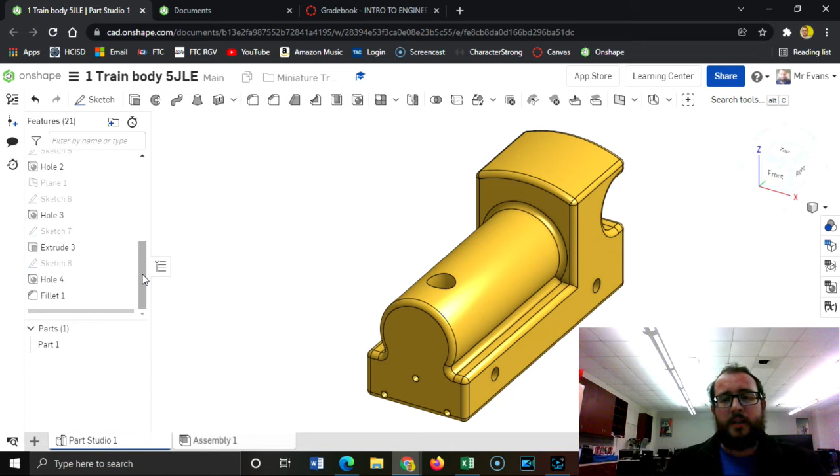Today we're going to make the train body. As you can see, it takes several steps. None of them are overly hard, and maybe only a few items you haven't done before. But it is very dimension heavy. With all the little holes, each hole comes with 3 dimensions: its size and 2 dimensions for its location. So if you mess up one, it's going to be off. I'm going to go through this whole process from start to finish to make the train body, and later we'll learn how to decorate it better. Remember, this part is made out of yellow brass, which should contrast nicely with all the red brass pieces we've been making. Let's get started.

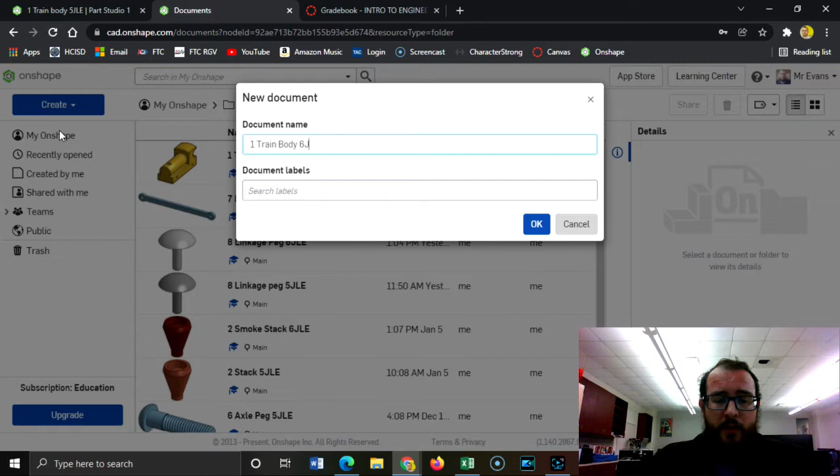In your miniature train folder, which you should already have, create a new part: one train body, then your class period and your initials. All right, let's go.

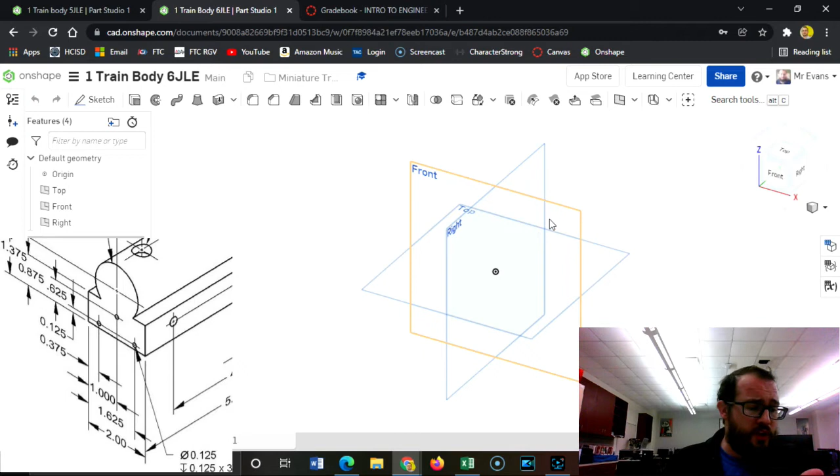To get this started, let's get the overall shape, starting with the front of the train. It's going to be a rectangle with a circle a certain height above it, and we'll combine those two together as one sketch, then extrude it the distance forward. The whole thing is 5.5, and the cab in the back is 1.75, so we'll subtract those two and make our first shape.

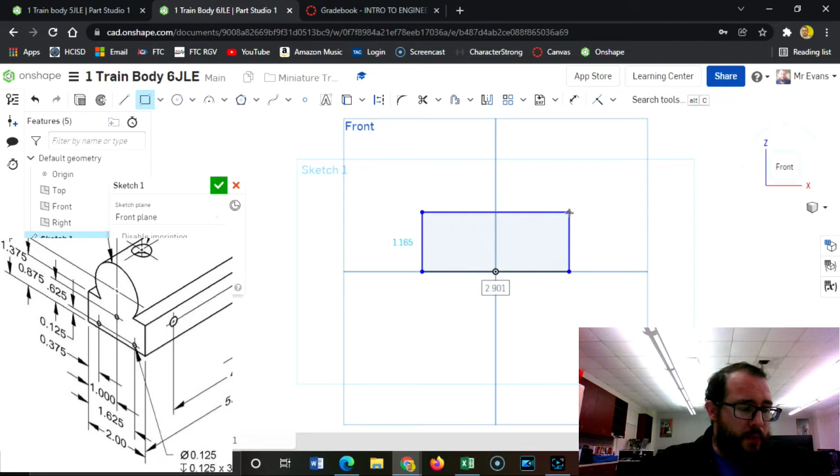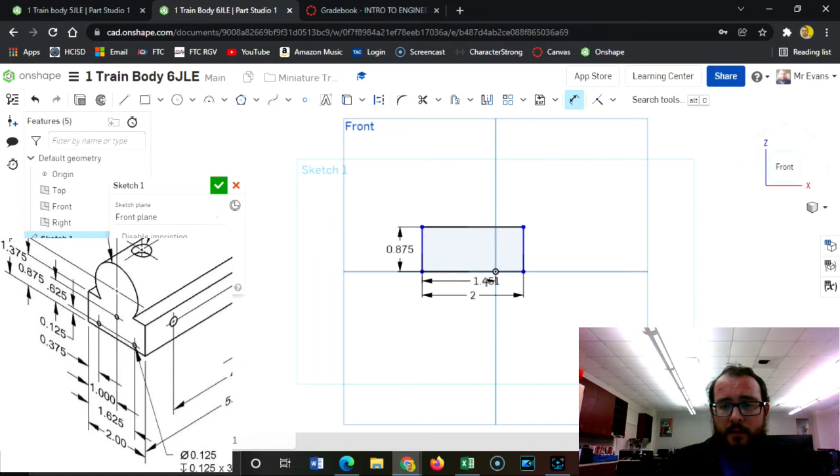I think it's important that we keep this thing centered. I want the right plane going right through the middle of the part. The entire train is 2 by whatever, and just the bottom rectangle part is 2 by 0.875. But I want this thing centered. So I'll take a dimension tool, click on the side, any one of the sides will do, then click on the right plane, that line right through the middle, and set that to 1 so it's centered. I think this is very important.

Next, I'm going to make a circle. Notice how it's lining up to the origin. I'll click somewhere up here and stretch it out, without snapping it to anything. I want that to be a radius of 0.75. This is a diameter, so that should be double that — 0.75 times 2, which gives us 1.5.

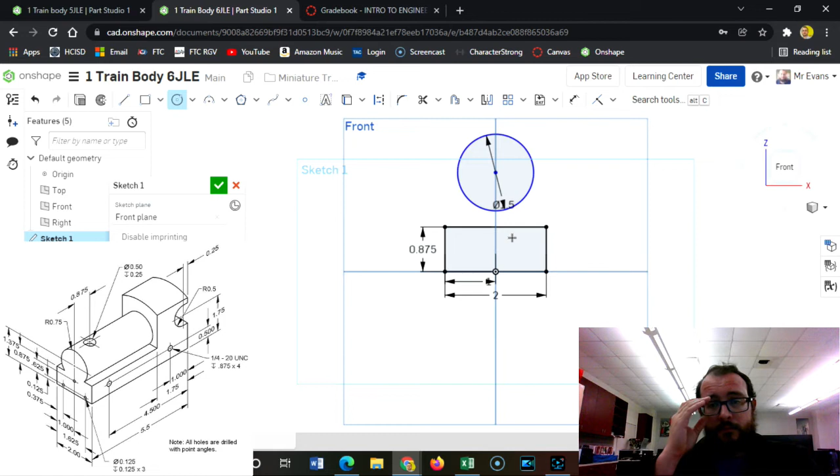Now it doesn't seem to be lining up correctly, and that's because this is a certain height above the bottom of the train. If you look, it says it's 1.375 from the bottom — the center of the tank part there.

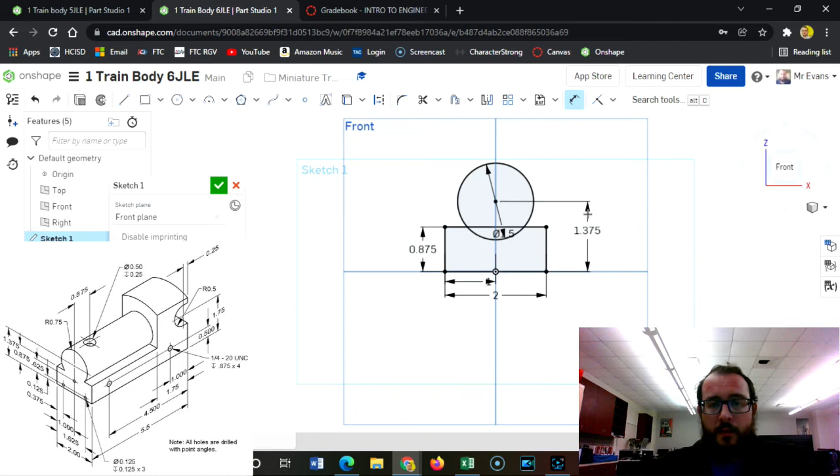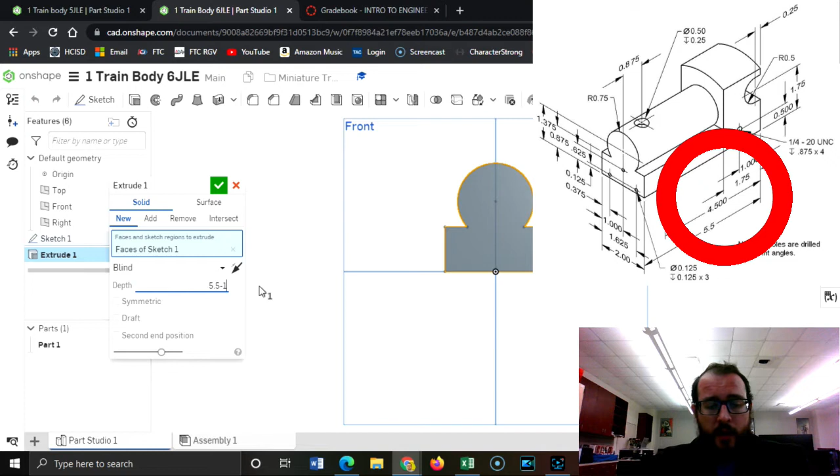There we go. Now we're going to cut the intersection part so we can make this all one piece, and it's ready to be extruded. The whole train is 5.5 and the cab is 1.75, so I'll subtract that part from it, then get the full extrusion that I need.

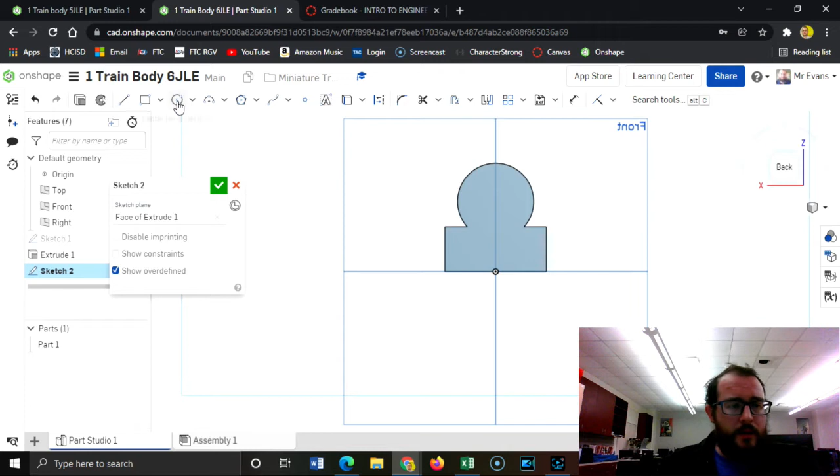There we go. Now to do the cab part. Let me create a sketch on the back here, right on this surface. If you look at the bottom picture, it shows the back of the cab, and there's a little hole at the back — it's the hitch magnet hole for the hitch peg, so you can connect cars to it. It says that hole is 0.375 above.

Let me just put a point for that: 0.375 here, 0.375. And from that, there's an arc. I'm going to use a center point arc, centered right here.

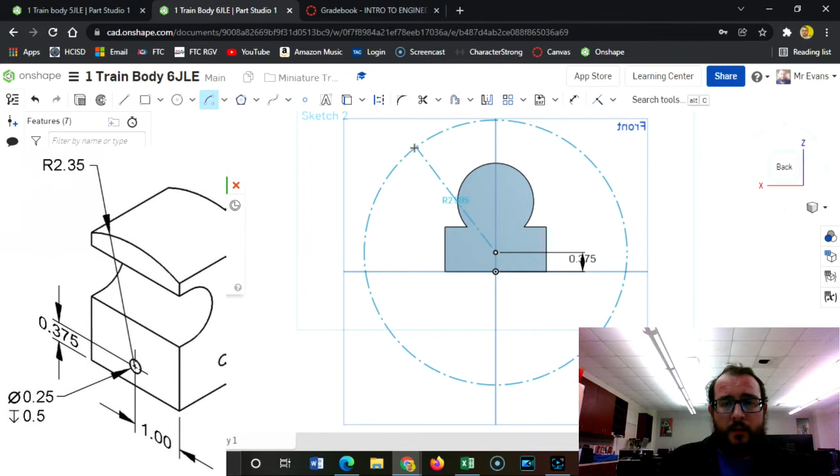And that has a radius of 2.35. There we go. It's important that it has the correct center. If you don't have the correct center, it's going to be off.

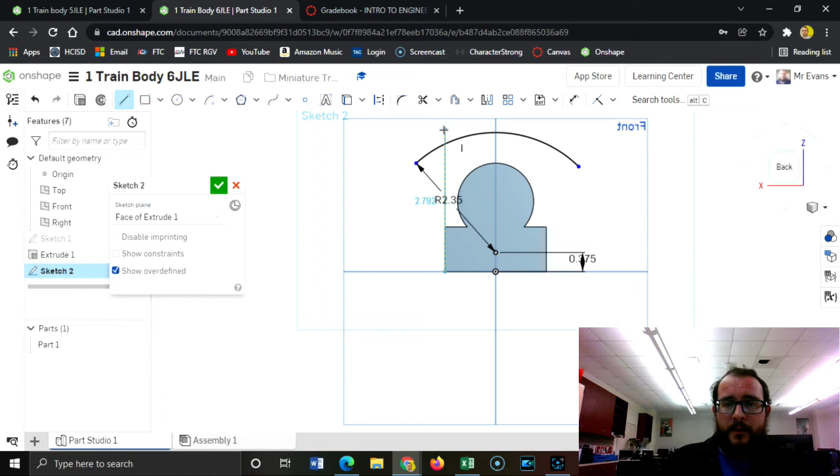Now it kind of looks tilted, but now I need to put some lines going straight up, and then trim everything up. So I need a line going straight up here, and then a line across the bottom, and then going straight up, and we'll trim off the excess.

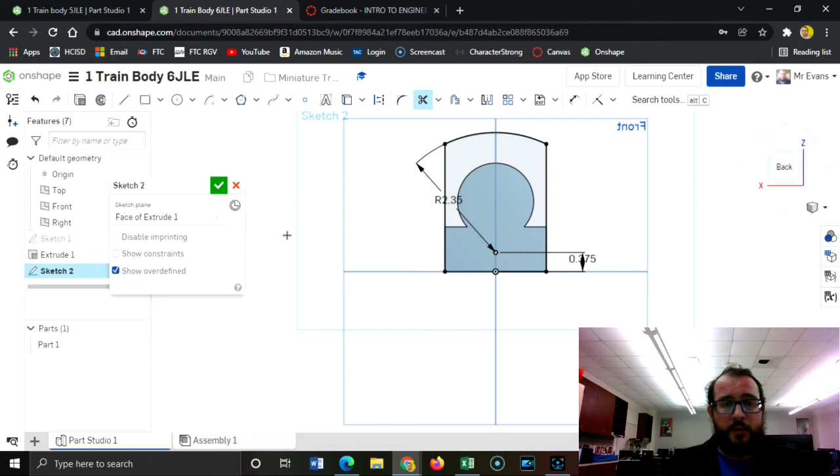There we go. I believe that's all we need to extrude that 1.75 out. So we'll hit extrude, click both of them, and that's 1.75. There we go. Now we have the overall shape.

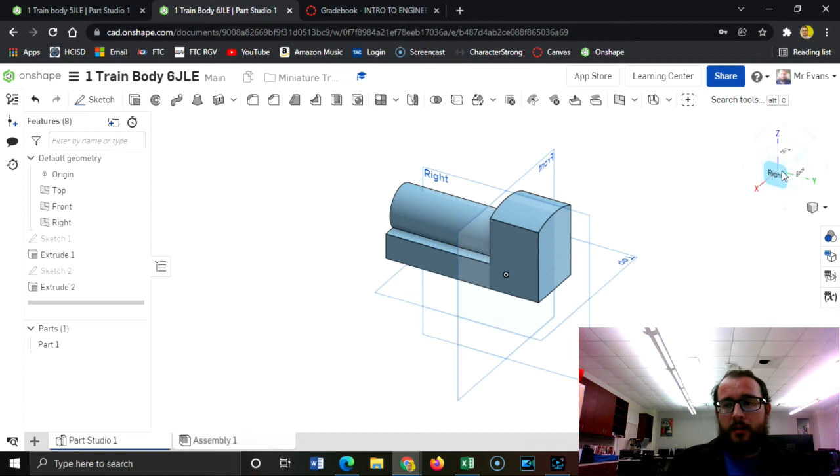The only other bigger feature we're missing is cutting the cab out of it. So we're going to create a sketch on this surface. The main part of that is a circle, it's a semicircle, and then the back of it is a rectangle shape. So to make this, I need to start with a circle.

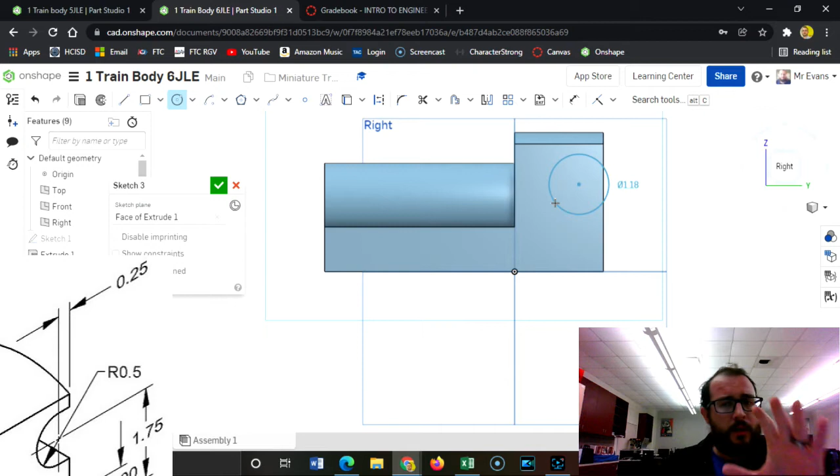I'm just going to click somewhere in the cab, not on a line or anything, just somewhere in the cab. That needs to be a radius of 0.5, which would be a diameter of 1. This is taking some time loading, apparently.

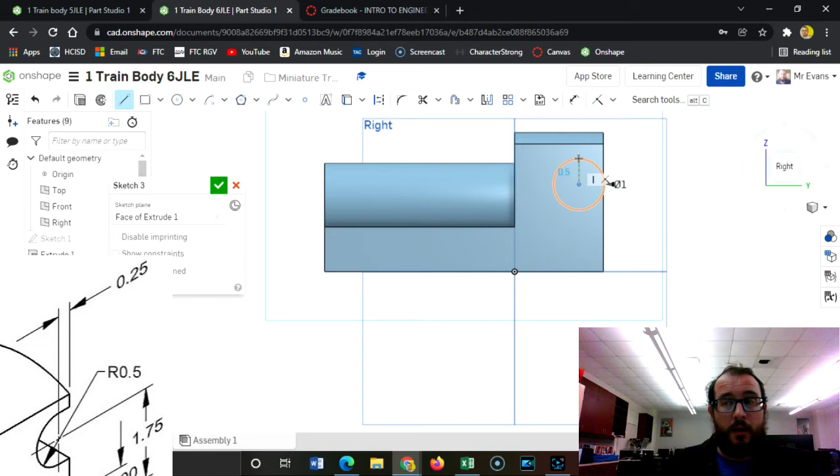Then I'm going to use the line tool. I'm going to click on the center and go straight up, click on the circle. It needs to be a vertical line. You see the symbol there that's a straight up and down line? That means horizontal—sorry, vertical. That means vertical. Then I'm going to come out horizontally and click here. Hit escape, and then do the same thing but down below.

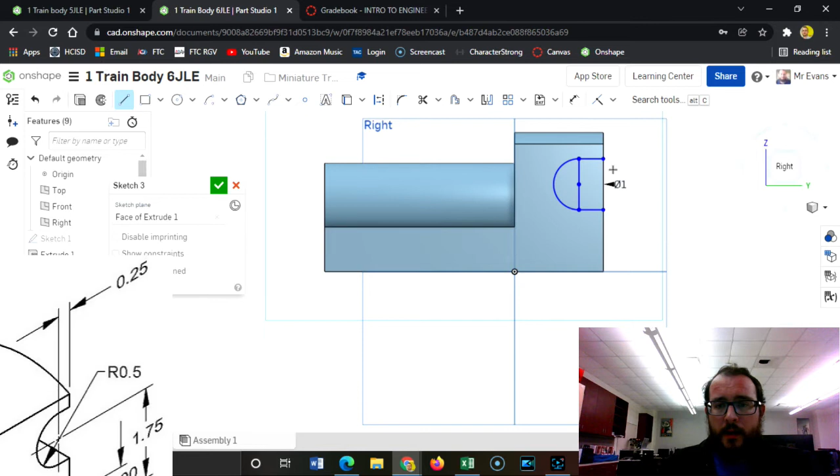Going to use the trim tool now to trim off that part, and then close this off. And I can remove this part too if I want. There we go.

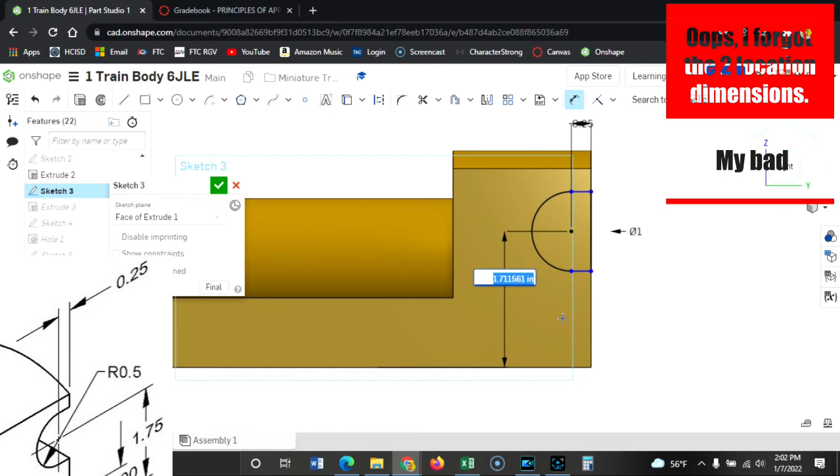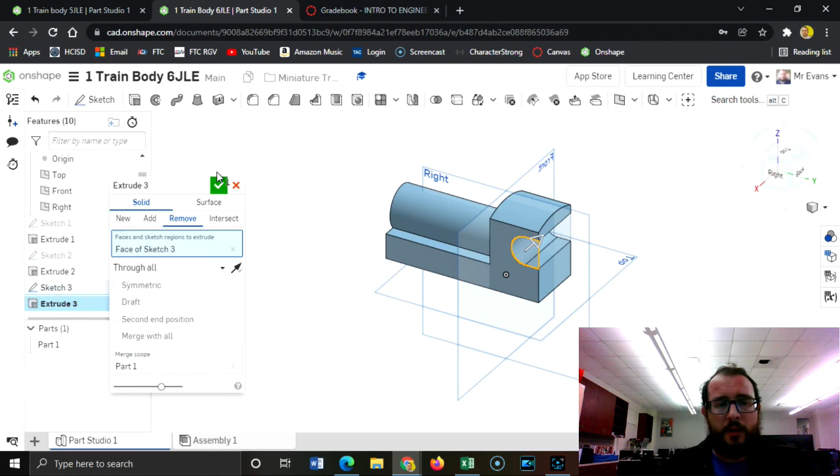So now I just need to extrude that. Remove through all. Looks like it works. Check mark. All right, so now we have the basic shape.

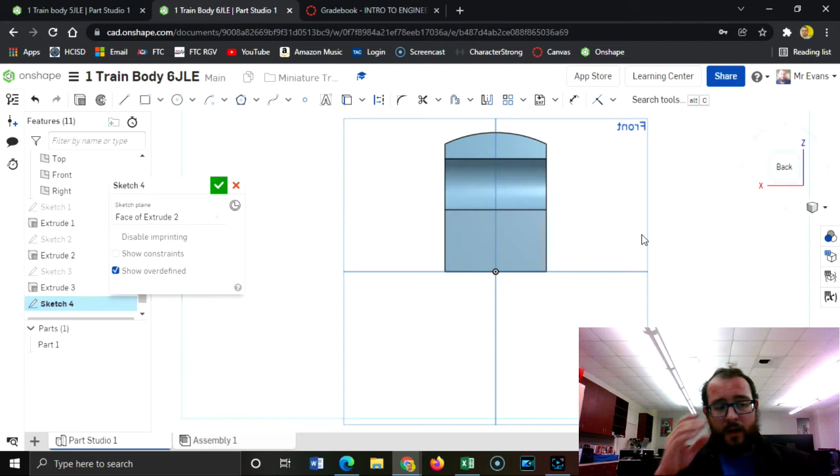The next step is to put in all the holes, and that part takes some time. So let's get each one down. Let's start by putting a sketch here. And we have a hole that is 0.25 and 0.5 in.

So I'm just going to put a point where the center point will be. See how it gives me that right there? I'm going to just put a point there. Check. And then I'm going to click on the hole button. Click our point. We want not a counterbore, just a simple hole. Blind, meaning it has a certain depth to it, not all the way through.

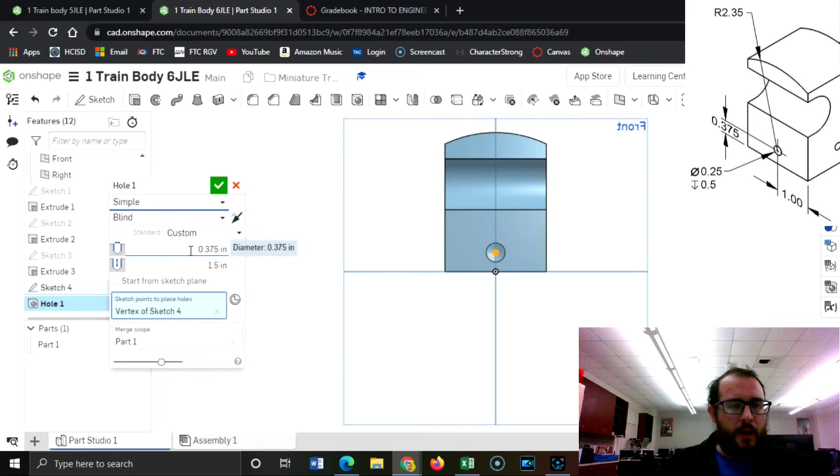Its diameter is 0.25, and 1/2 inch for depth. Okay, now we should have some holes on the side.

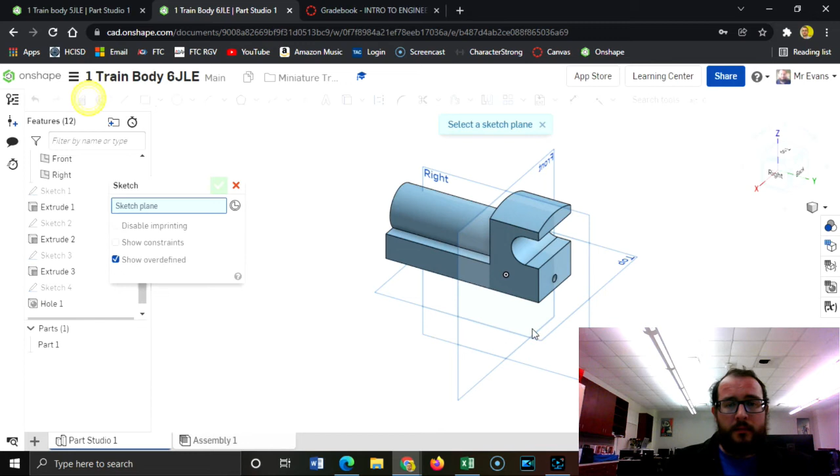We're going to have 2 points. And I want these points to be horizontal to each other. So I'm going to click each one and say horizontal so that way they're lined up. That's very important—if you don't, then you've got to do two separate dimensions for height.

According to this, it is 1/2 inch high, and it is 1 inch over, and this other one is 4.5 inches over. Again, you can get all these numbers from your paper in your notebook.

Now, this thing calls out that it's 1/4 dash 20 UNC. It has a depth of 0.875, and it says times 4. That's because there's holes on both sides. 1/4 means 1/4 of an inch. 20 UNC means it's threaded. It has a thread count to it, and that's what we're going to do.

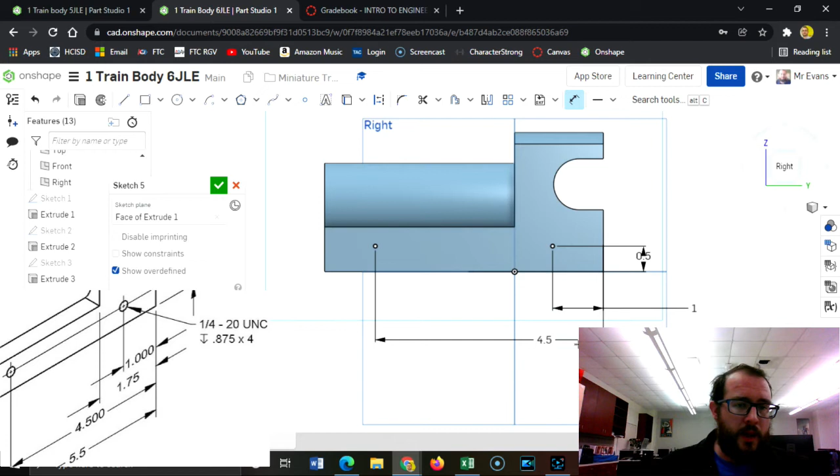Now, there isn't a way to do a thread count call out for the hole here, which I find kind of annoying. Unfortunately, it's not that way. It's 1/4 of an inch, so we can leave that. And this is 0.875.

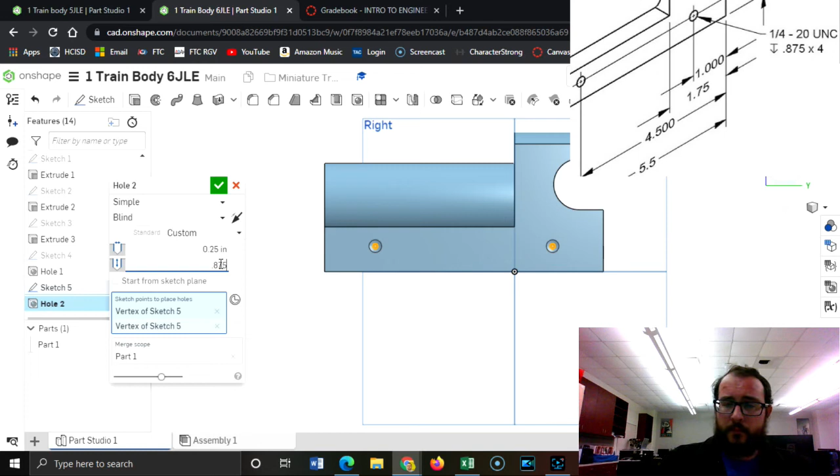There we go. So we don't have a way of putting threads on there. We can call it out as a note if we were to do a drawing page.

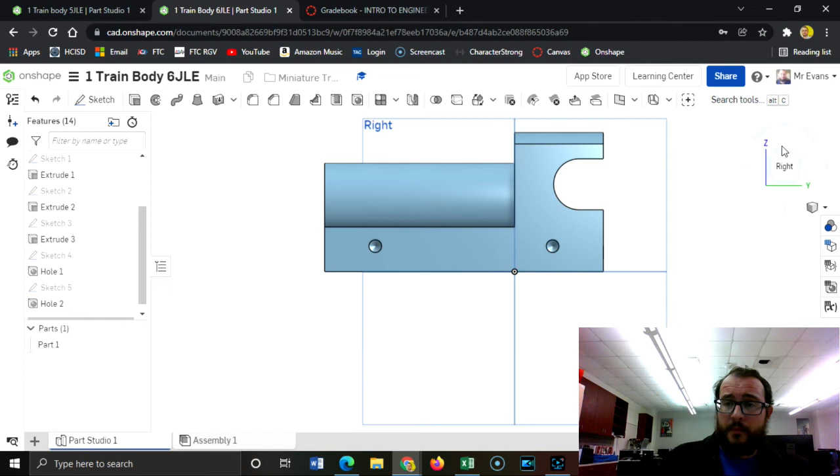So mirror this onto the other side. Oh, perfect, you already did. Great, I'm glad you caught up. So now we have the holes in the front.

That is going to take a sketch right on the front here. This one is very intense with dimensions. So in the corner, I'm going to put all the dimensions in one place. And we have 3 points here, here, and here, something like that.

One of them is right in the middle. And we're going to make these two horizontal to each other so we don't have to put in that many dimensions. We've got a height of 1.25.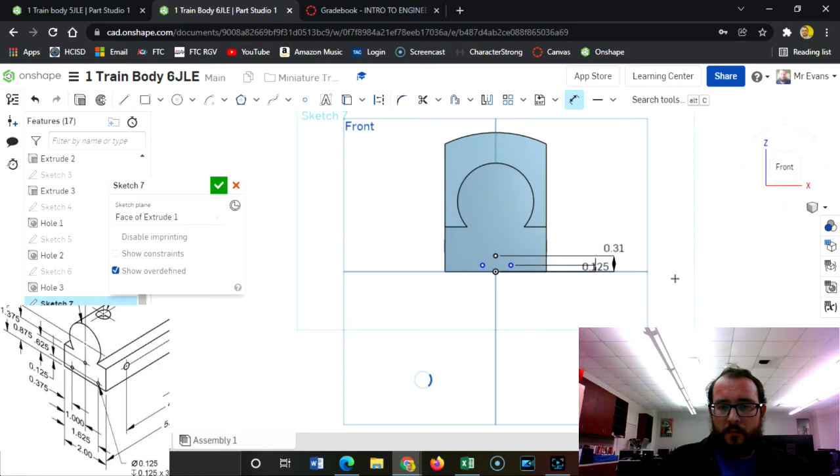625. And then they are distances from the edge. Oh, whoops, that's not the way it has it. It's all referenced off of one edge, 625.

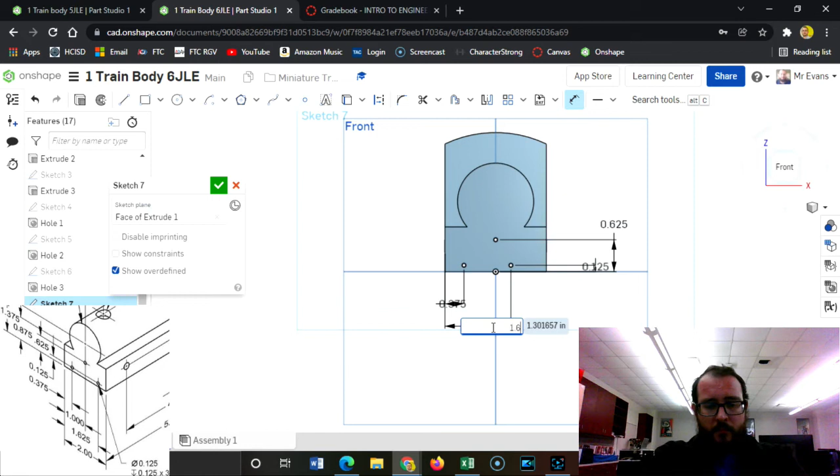There we go, and we will extrude these out, as a whole. So we'll do each one of these.

Just keep in mind that 0.125 times 3 doesn't mean you multiply that number by 3. It just means there's 3 of them.

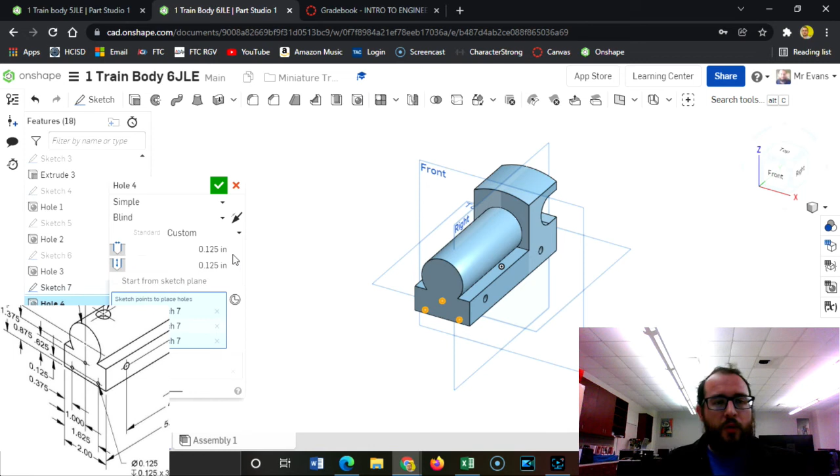Last one is to put that hole on the top. Now this can be a little bit of a challenge. To do so, we need to do a plane offset.

So I'm going to click on the top plane, and I need to offset it so that it is right on this surface here. And I can calculate that, remember we put a dimension from here to the center of this circle was 1.375. And then I add in the radius, because that takes us to the center of the radius of this, which would be 0.75.

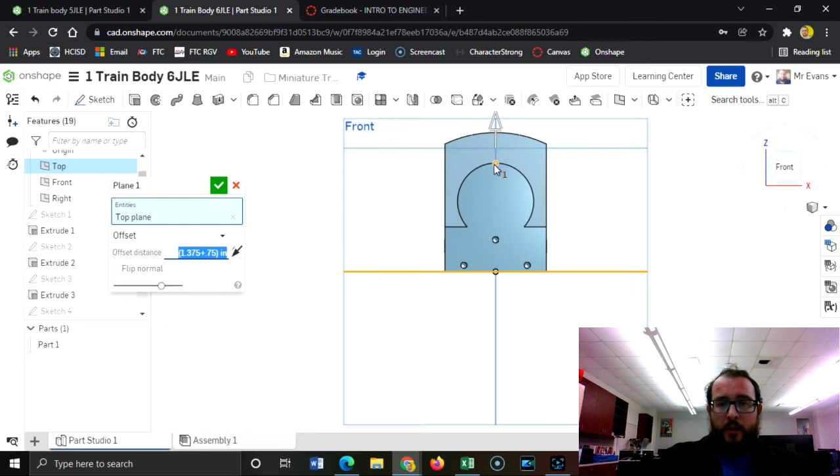And that should put me right at the top. See how it lines right up with it? Perfect. Now we can create a sketch on there, on this new plane 1.

I'm going to look at it straight from above, and we're going to put a point there. And we need it to be able to reference from the front of the train to that point. And if we look at the dimension right at the top, it's 0.875.

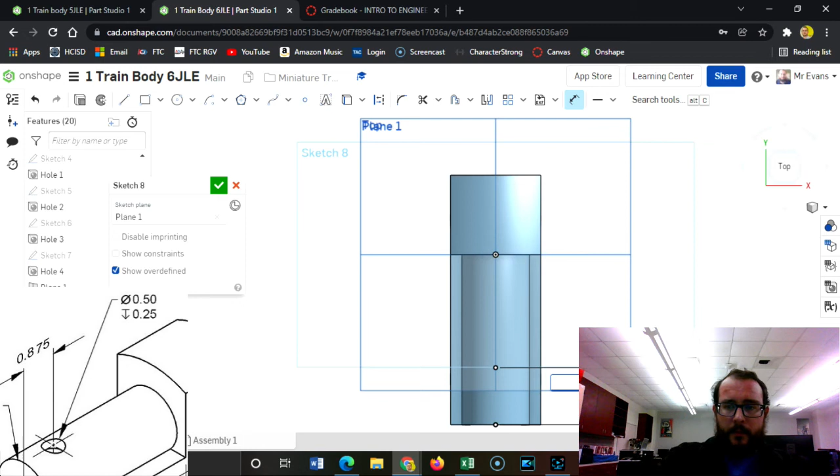There we go, and we are going to make that a hole. And you can get the sizing from it right off of the paper.

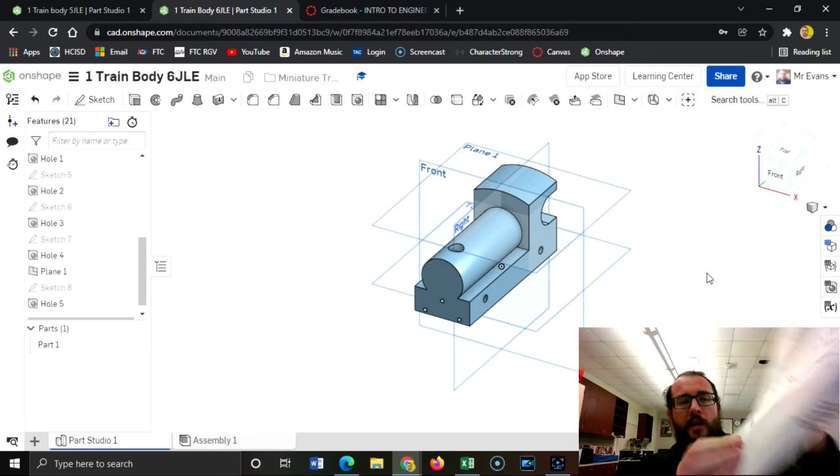There we go. Now we're completely done minus the last step. If you notice, there's a little note that says all round edges are 0.1 in radius, and there's some 31 edges that we need to click on.

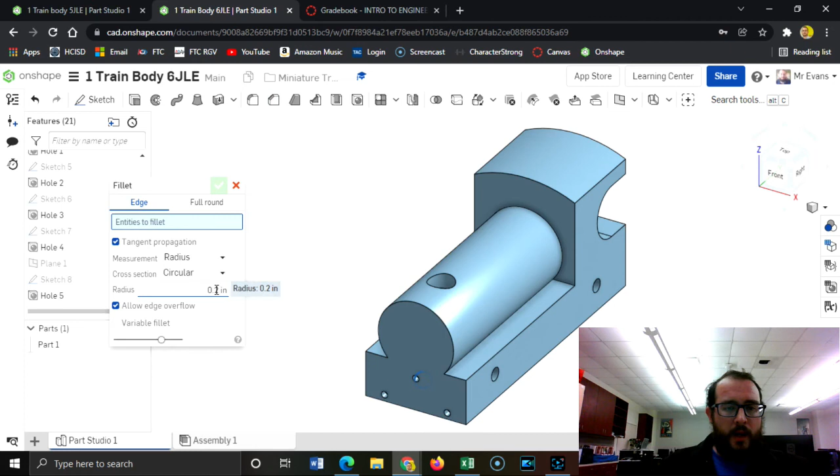I'm going to get rid of all of our planes that we're looking at and the origin, just so they're not visible. So I'm going to hide them all, and then I can zoom in a little bit better. And I'm going to start with my fillet, and I want to try and get all of them at once.

So I'm going to start kind of meticulously right at the front here. Okay, so now I got the front rounded.

And then I'm going to click these side edges here and here. I'm going to get the crease in between here. See how that makes it a lot rounder look. Make sure to get both sides of this crease.

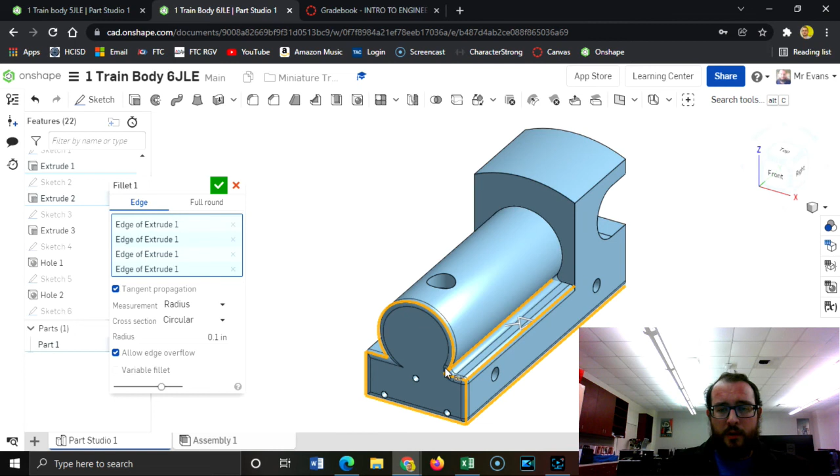Okay, let me get the part that wraps around the train. I click here, here, here, here.

Okay, and then we have the top of the train, this little roof part. I'm going to kind of switch to the back here. I've got this back part here.

And then let's go into the flat part and the circle part of the cab. There's a little tiny piece here, don't miss that.

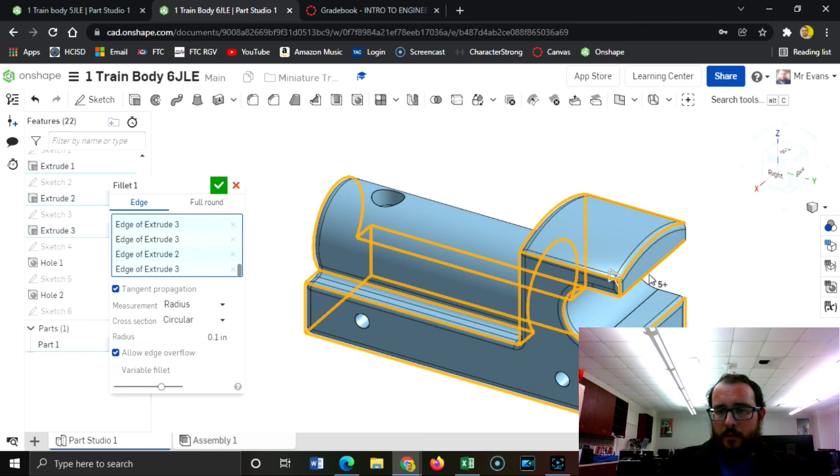And then almost done, I think there's about 38 edges. And then last little piece right there. All right.

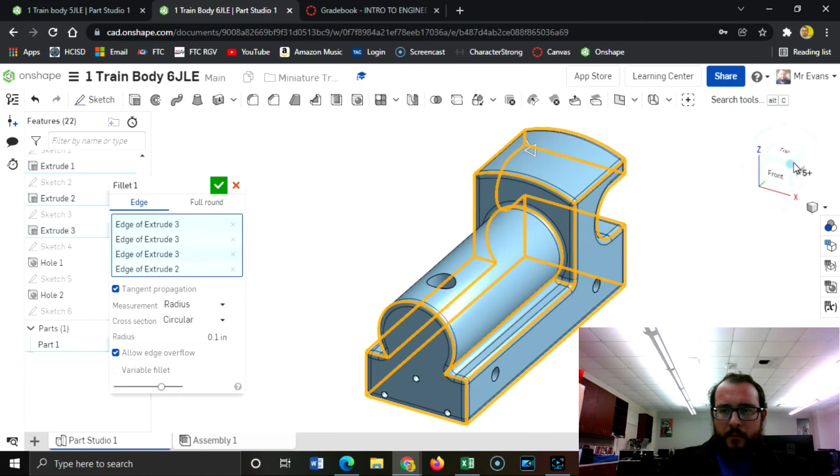Looks like we got them all. Let me just kind of inspect. Oh, not like that. Should be good.

There we go. Now the train is complete, ready for some decoration. Let's just set it to the right material. It is on your paper, yellow brass.

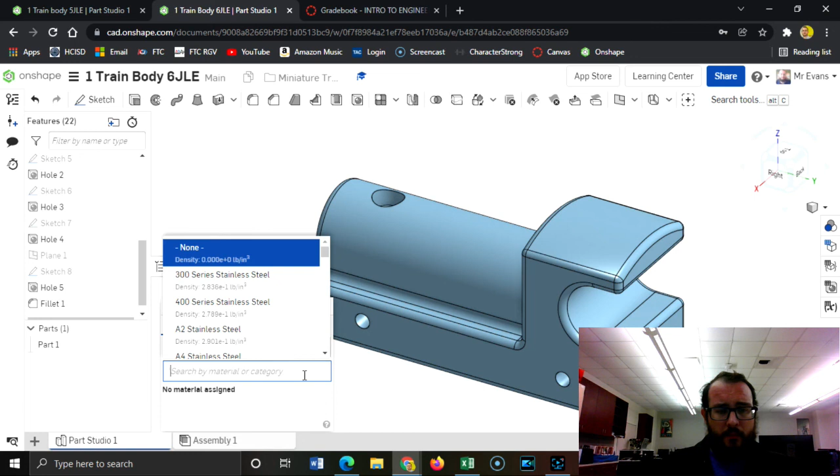And we'll give it a nice appearance of yellow for right now. Let's see here. Maybe, you can kind of pick your yellow there. We're going to try and decorate this a little bit further later, but let's get all the parts finished first.